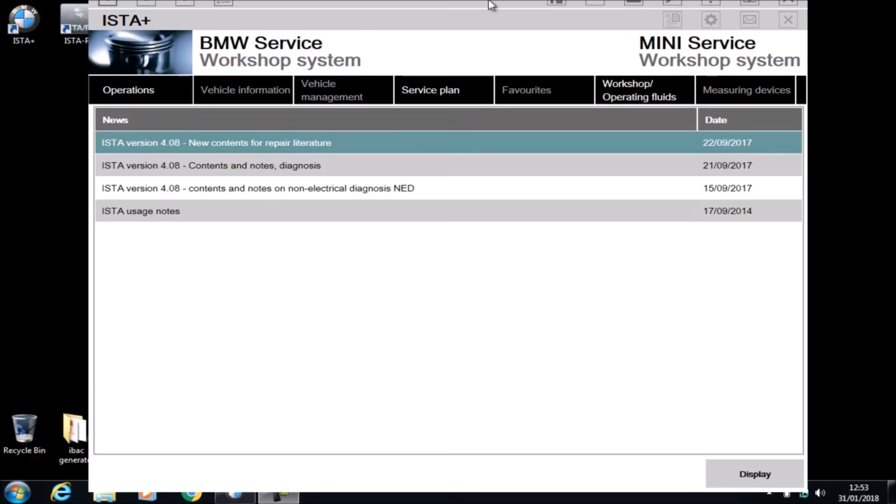As you can see, this version is actually version 4.08, which came out in September 2017.

So, what we're going to do today is a quick diagnostics, just to show you how to use it briefly. Once you've loaded it up, you want to make sure operations, new, and either VIN or readout data is checked. In my case, I want to do readout vehicle data, and then down the bottom I'll choose complete identification.

It's quite a big system, so you do need a very fast laptop with a large amount of RAM. I would recommend a minimum of 4 GB of RAM.

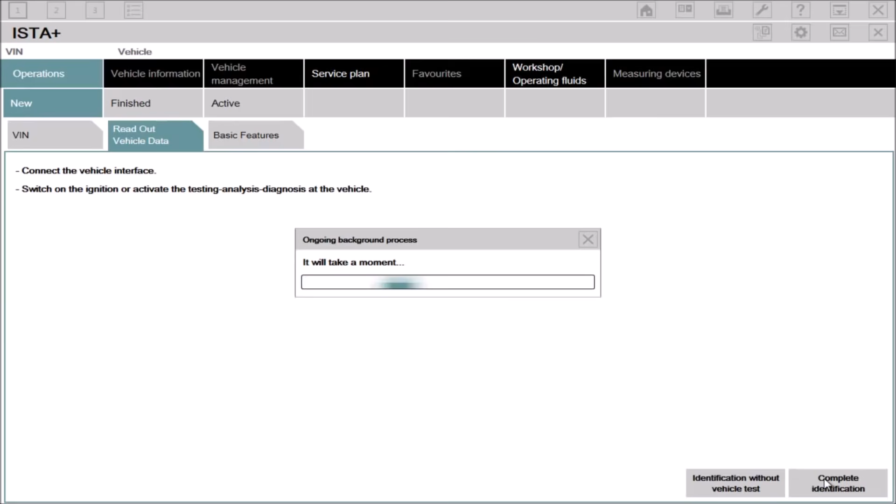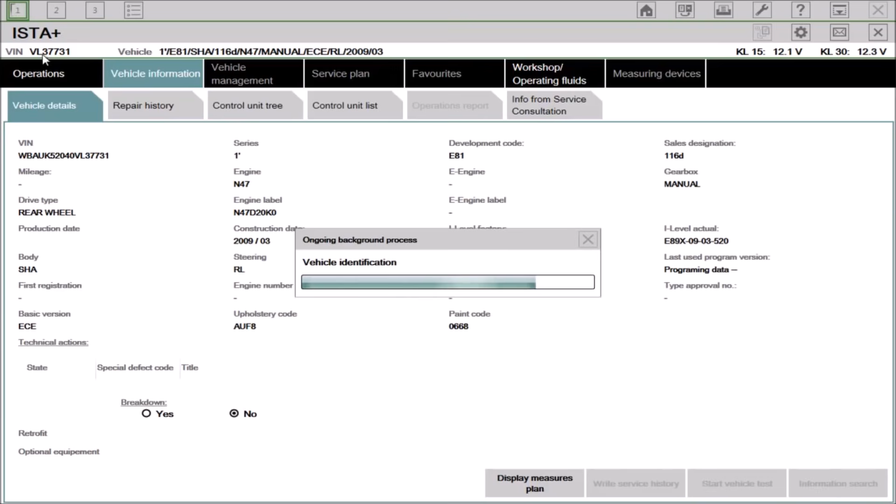So what it's doing now is picking up the VIN and other information about the vehicle, such as the engine number or the engine type. As you can see at the top here, you've got the last 7 digits of the VIN. It's a 1 Series, E81, etc.

The system will automatically go to the next page, which is the control tree. As you can see here, it's highlighted up here.

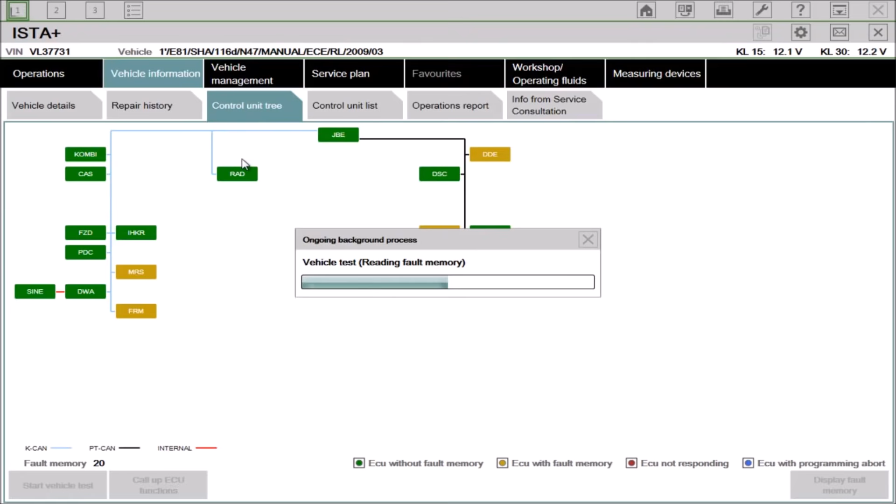What this does is pick up all the ECUs in the vehicle. The ECUs that are green indicate that they're perfectly fine, with no faults picked up. The modules that are amber normally mean that there's a fault stored, and quite often you might get some that are red, indicating a major problem or an ECU not responding, etc. As you can see down here, you've got the information on what they mean: green, no fault memory; amber, with fault memory; red, not responding; and there's blue there as well.

There are known faults with this vehicle, including deployed airbags, so I know exactly what the problems are.

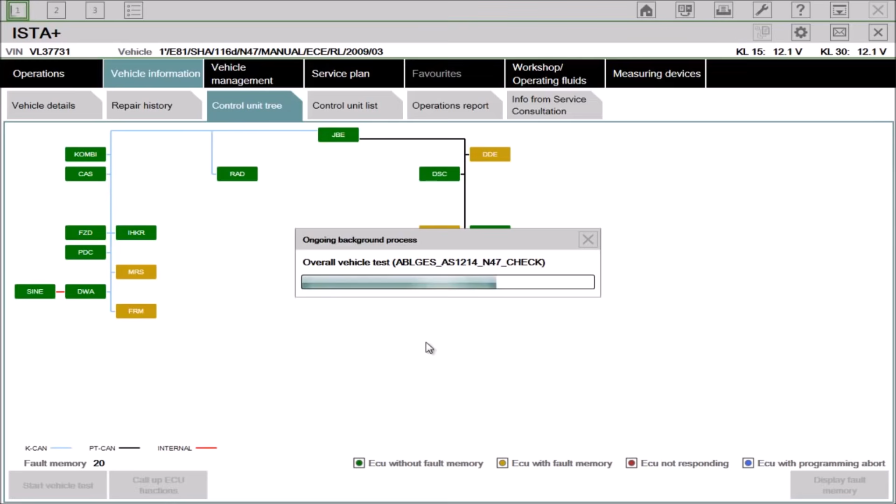Okay, so we can do a couple of things here. We can actually go into each individual ECU, so you just highlight it. For example, I'll highlight this, the DDE, which is the diesel fuel electronics, and then you can call up ECU functions down here. What this does is give you the information about the ECU and lets you run some tests.

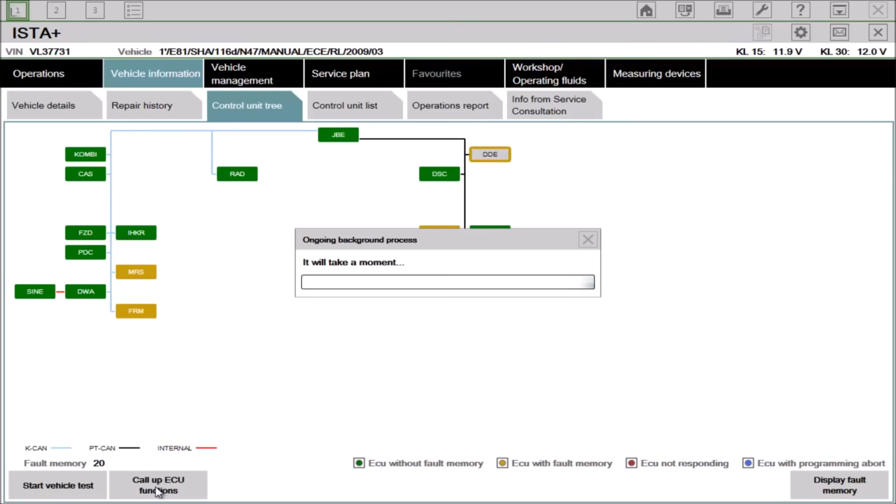This system is a little bit slow because it's a customer's laptop that they've supplied me for the installation of ISTA. It's actually a dual core - I wouldn't recommend a dual core. I'd recommend something a bit faster than that if you were going to use your own laptop.

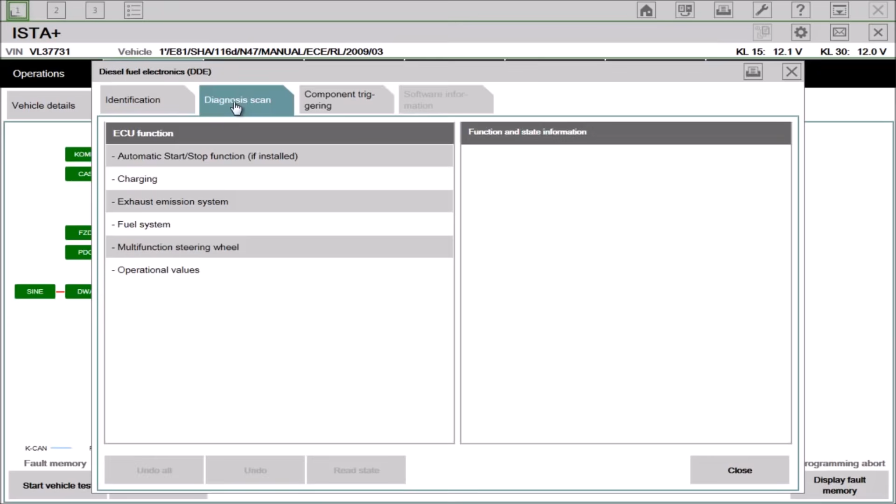Okay, so here we have it, the DDE. It's got the part number and all the information about it. You can do all sorts of tests, like the automatic start-stop function if installed - you can read the state of it, etc. You can do all sorts of tests here, and you can delete fault memory here as well. I'm going to close it for now.

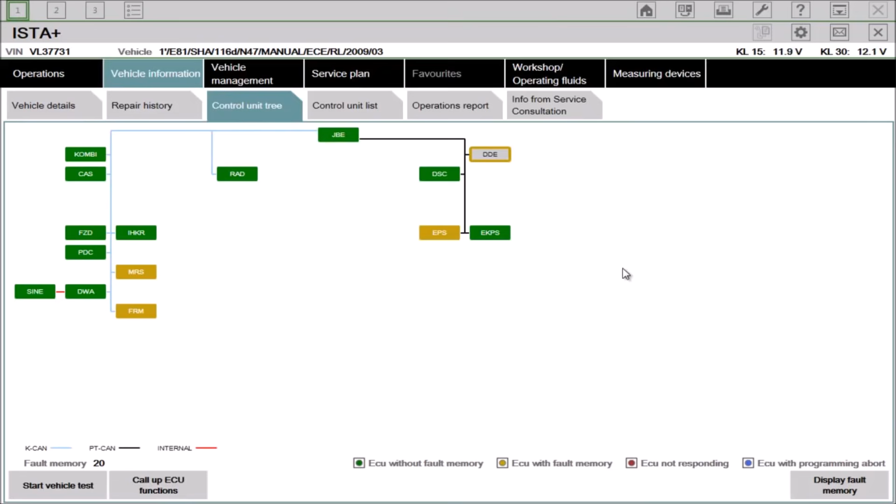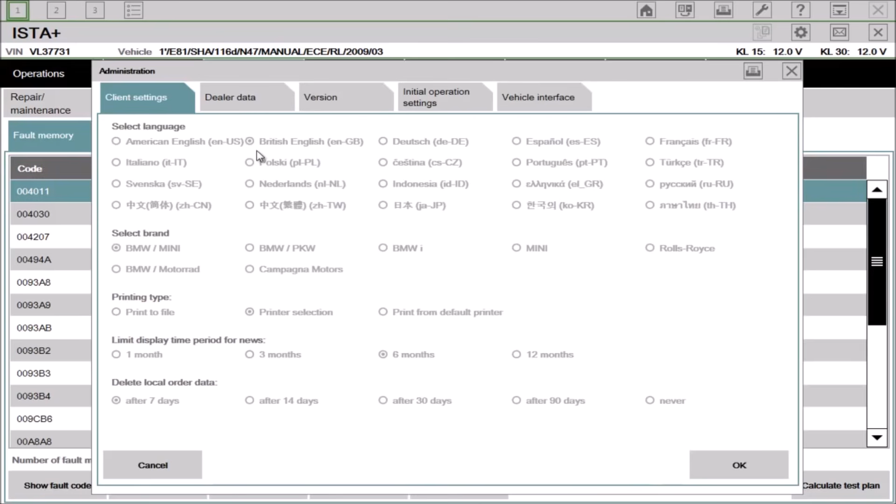And I'm going to display fault memory. This page gives you all the fault codes of every ECU - DDE, yeah, at the top here. Okay, so 'Ja' means yes in German. I'm not sure why it's displaying 'Ja'. The previous versions didn't, despite the system being in English, just so I show that to you. Up in the settings, you can see English, British English is checked. So I'm not sure why it says that. For 'no', as in any faults - no, it displays in English. There's probably just a glitch with this particular version, but you'll get used to that. That's the only German part of this system - 'Ja', yes.

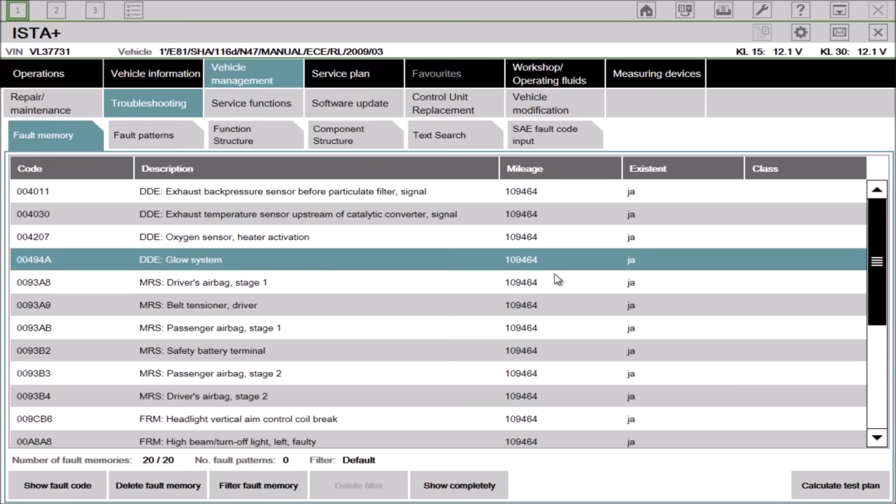Okay, so say we had an issue with, I don't know, the glow system - we can calculate a test plan.

There's a lot of faults on this vehicle, so it's running a little bit slower than it would, plus the slow laptop, but we'll get there in the end.

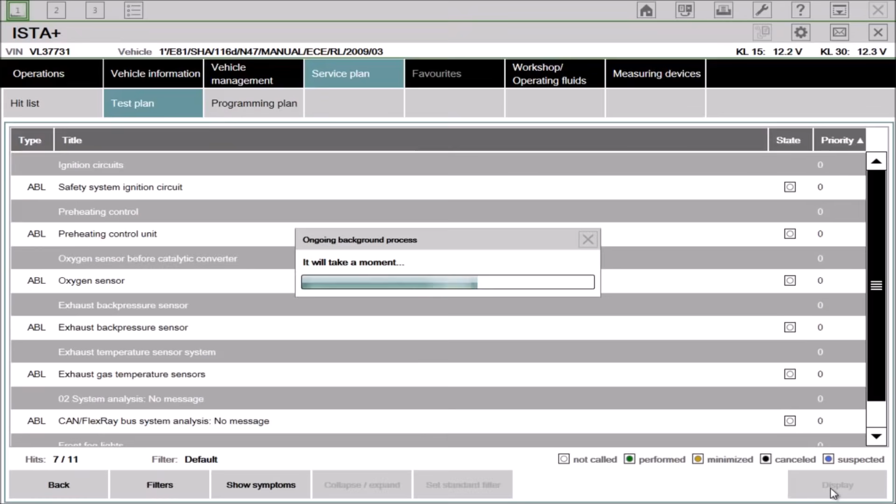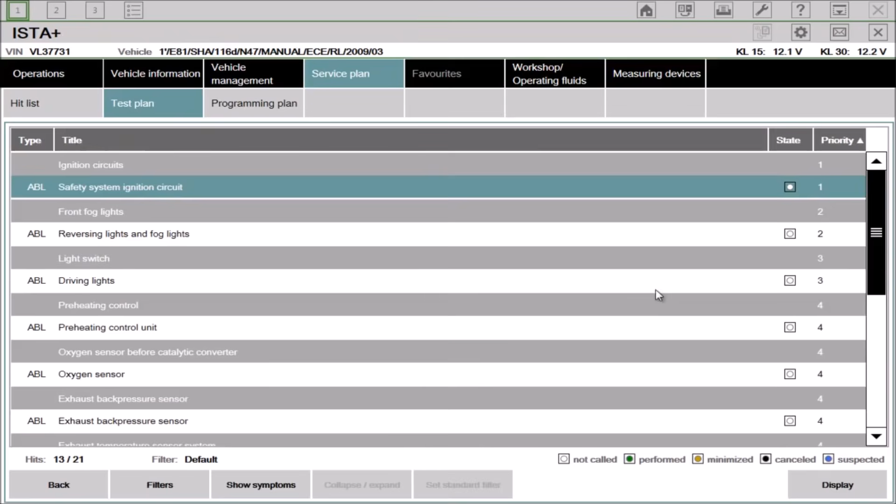So they list the faults in priority. Let's just stick to the top here: safety system ignition circuit. So you'd highlight that and display, and then what this would do is give you a bit more information about this issue.

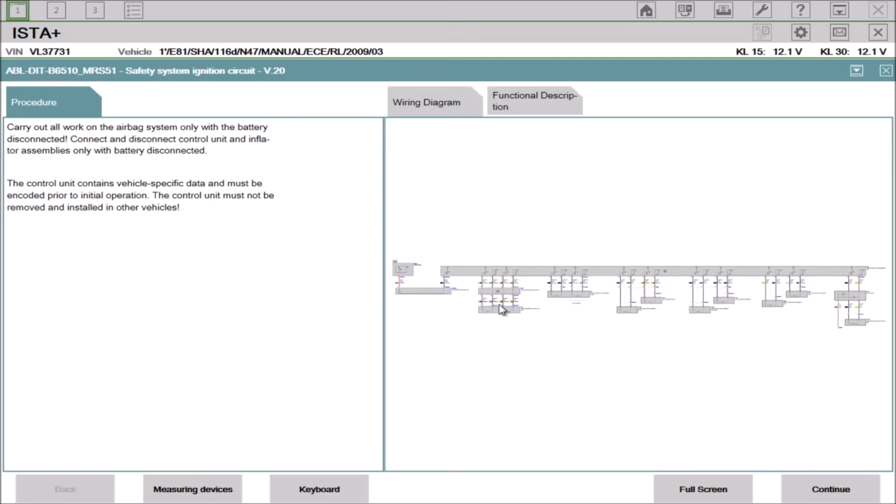Including wiring diagrams, because, yeah, it's the airbag system, so like I say, I know the fault with this. I don't need to look at any of the wiring diagrams, but you can see that they've all come up. It's a complete system with the wiring diagrams built into it as well.

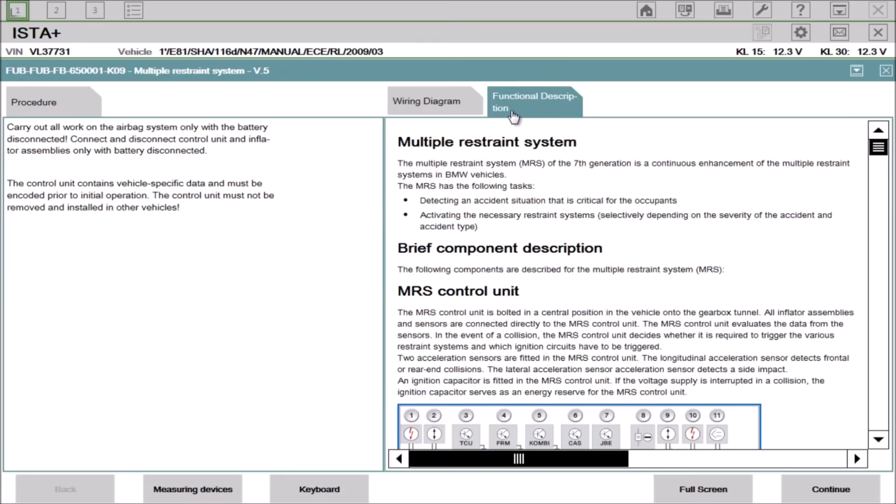So what you do if for the complete test plan would be to continue here. You could read all this information, it's up to you. And it basically gives you a guided test. So we know that all these airbags are actually deployed, including the belt tensioners.

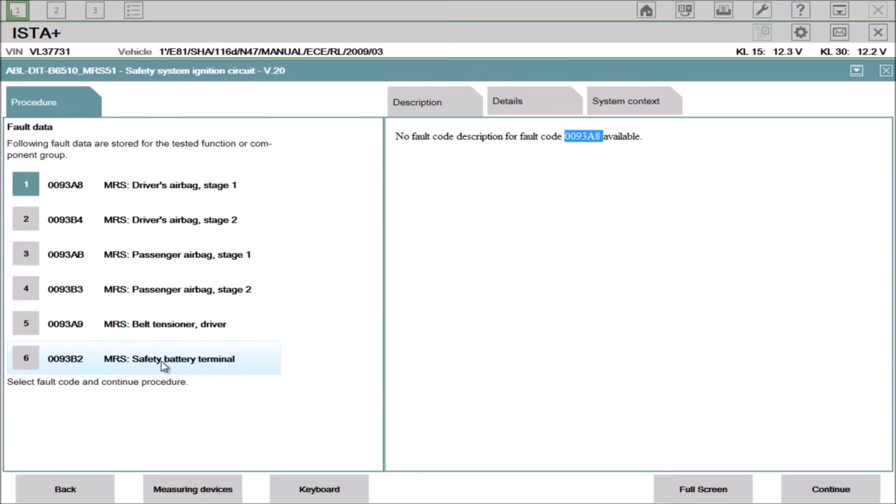There's no description for this fault code because the description is actually here. So fault code 0093A8 is the driver's airbag is deployed, which I believe is the steering wheel airbag, and the tensioners as well, belt tensioners, battery terminals gone, and you can continue doing the fault finding. If you wasn't sure what the fault was at this stage, you can continue, and it will take you through guided tests, and it's really as simple as that.

There is another, to close it down, by the way, you just close this little cross here.

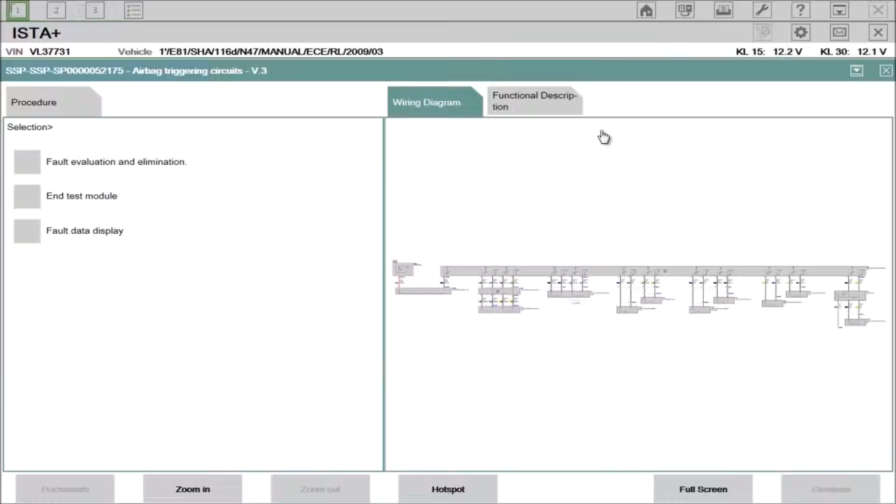Just a quick tutorial. I want to show you how to open and use, well, not use, but just open ISTA P.

So it's quite a big program. Once you launch ISTA P from the desktop, you'll be presented with a menu, and you have to pick the option that suits your needs. So the first one is for BMW vehicle cars, second one is for BMW motorbikes, electric vehicles, minis and Rolls Royces. So I'm just going to pick the first one for the sake of this video.

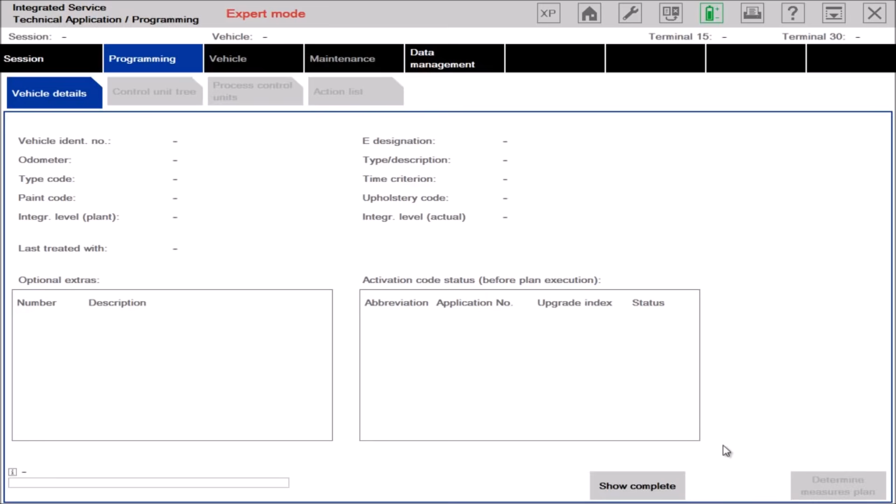And what it will do now is it will try and pick up the head that you've got connected, the ICOM head, or whatever head you'll be using. It should display it on the next screen, which it does. You highlight that and then you click connect. And then it will start trying to pick up the vehicle, but I don't have a vehicle connected, so it's not going to pick anything up. So for now...